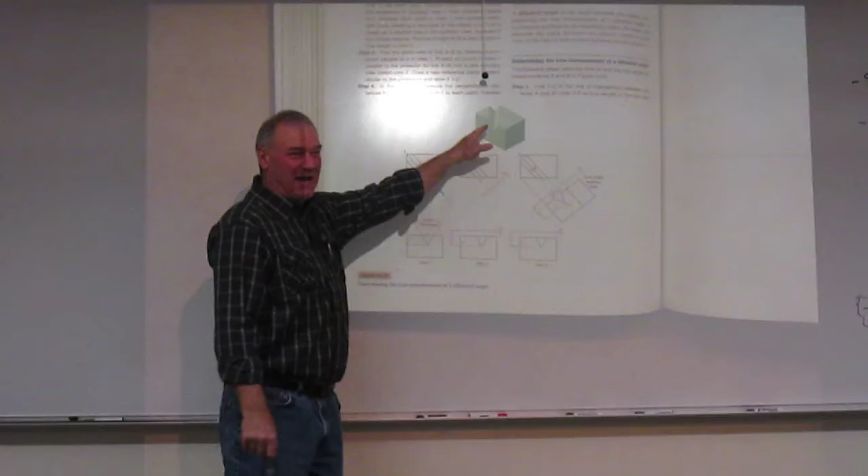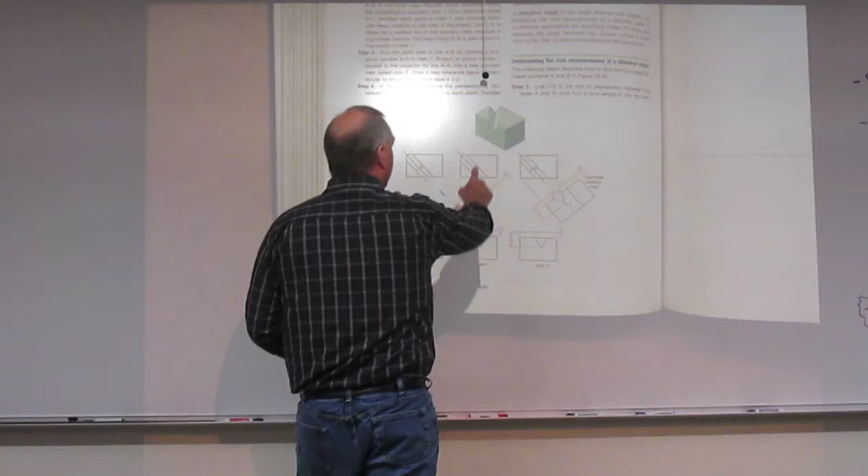Here's a dihedral angle. In essence, a dihedral angle is an angle formed by the intersection of two planes. Now, the problem we have with dihedrals: they're not a problem if we can see them in orthographic projection, but many times they're like this one, where they come at an angle to our normal planes. Therefore, you're never going to see this angle of cut. So if a person's constructing this, how do they know what this angle is? Because they're going to have to set a machine up on that to cut it, and we can't describe it to them.

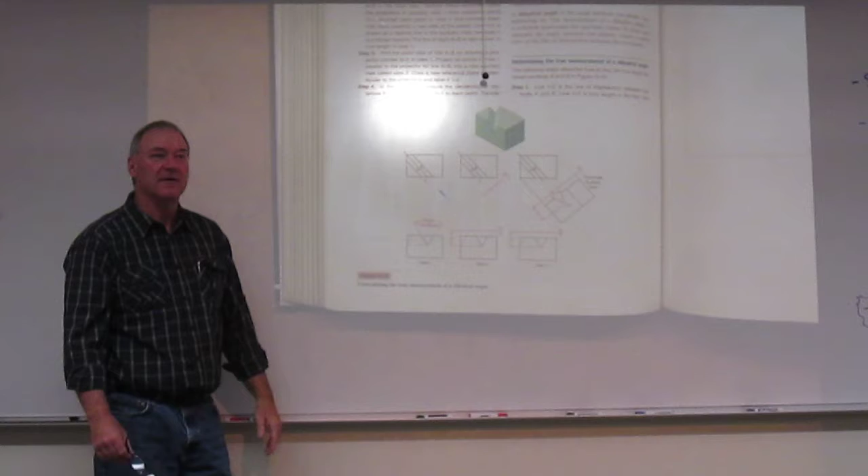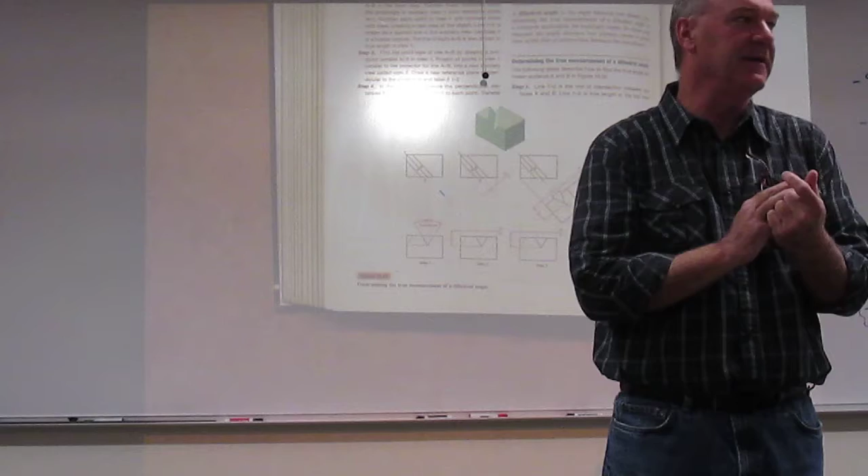Standard orthographic projection you see down here, none of these angles are going to be right. So we don't really know what that angle is, and we aren't telling them. We've got to be able to solve this one. They showed the solution of it over here. So in essence, we're going to use the information in Chapter 13, auxiliary views, to solve the problem of inclined planes, oblique planes, and dihedral angles. That will solve those three description problems. So those are the three reasons we do this.

Now, if we're going to jump into a chapter called auxiliary views, I guess we ought to define auxiliary views. Did anybody pick up in the text what an auxiliary view is? Wait, what did she say? It's an orthographic view that is projected onto any plane other than one of the 6 principal views. Thank you. That's a good way to say it. To summarize, auxiliary views: any view other than your standard 6.

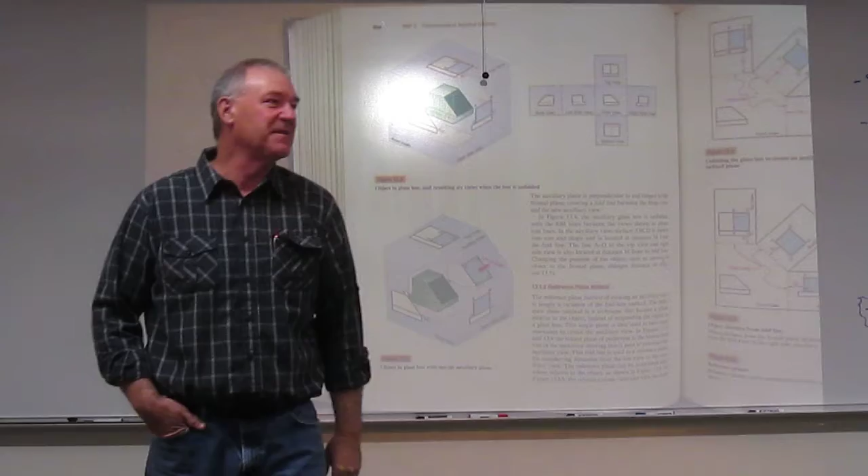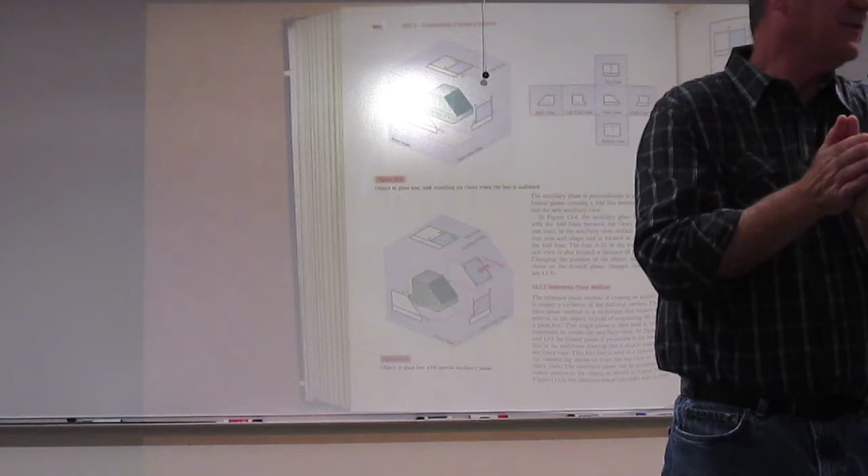I want to look on page 654, and we're going to compare and contrast figures 13.2 and 13.3. This is a pretty good example of what we do on auxiliary views. In 13.2, we have our standard glass box. Is this glass box real? No, it's not, right? It's an imaginary plane between us and the object, where we sit at infinity. Our line of sight is perpendicular to these sides. It's an imaginary glass box that we put out to be able to produce these views.

Now, if it's imaginary, do we have to stick with 6 sides on it? No, let's just start imagining other sides. We're not going to imagine them anywhere, though. We're going to come down to 13.3 and imagine a side that is parallel to the plane in question. So that's in essence what we want to do. We're going to put it parallel to our recognized plane, in this instance an inclined plane.

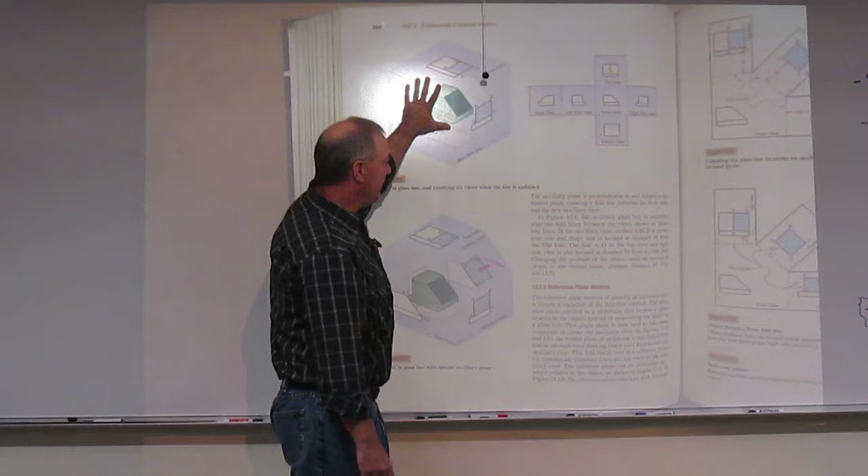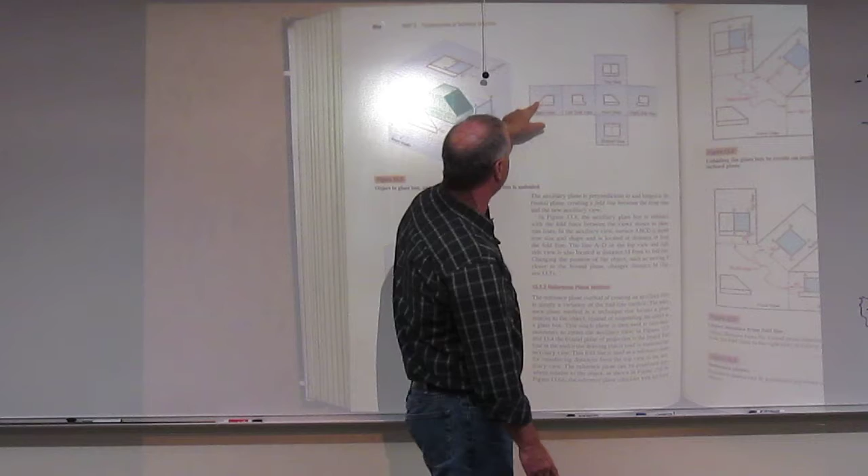Now when you look at the resulting views, here's orthographic projection. We've got this inclined plane. I see edge here, but then it's foreshortened, foreshortened, foreshortened. Where do I even see it here? Foreshortened, and then edge again. We never see it true, even in 6 views.

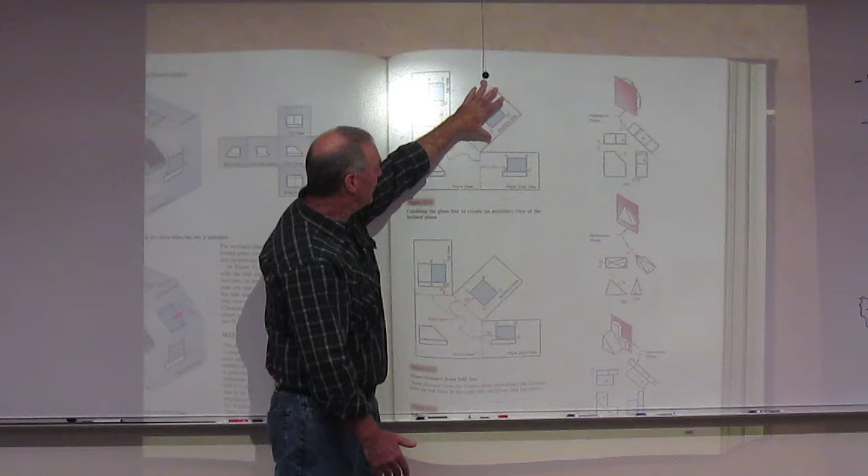Now, if we look at the projection that comes off of 13.3, it's shown on the next page with figure 13.4, which is right here. Again, we've got all the geometry described: edge, foreshortened, foreshortened. But here's that plane we put parallel to our inclined plane. We unfold it just like the glass box and put it here. Now I see that plane true size and shape. So somebody now has the information to build that surface on this object.

So in essence, that's what we're doing. Any questions or thoughts on this? Well, today we're going to take this and we're going to go through all the definitions of it. Tomorrow we're going to look at it and see how we do them. Let's go to page 656 and let's handle some more definitions here.

When we are pulling auxiliary views, we have 3 types that we pull. And we want to know these terms because we need to communicate that to other people, other drafters, and say, hey, I want you to look at this view, we need to know the names. In essence, this diagram here doesn't make a lot of sense other than a definition. That's the only thing this is here for.

Here's my front and top view. This to me looks kind of like a hip roof. You'd see this on a lot of houses. Okay. Now, they're not really turning this in the correct direction, but just keep in mind, these are our standard views. They have turned one auxiliary view right here. This is called your primary auxiliary view or just your auxiliary view when you're talking to somebody. What that means, it's always the first rotation off of a standard 6-view drawing. Primary auxiliary, first rotation off of a standard view.

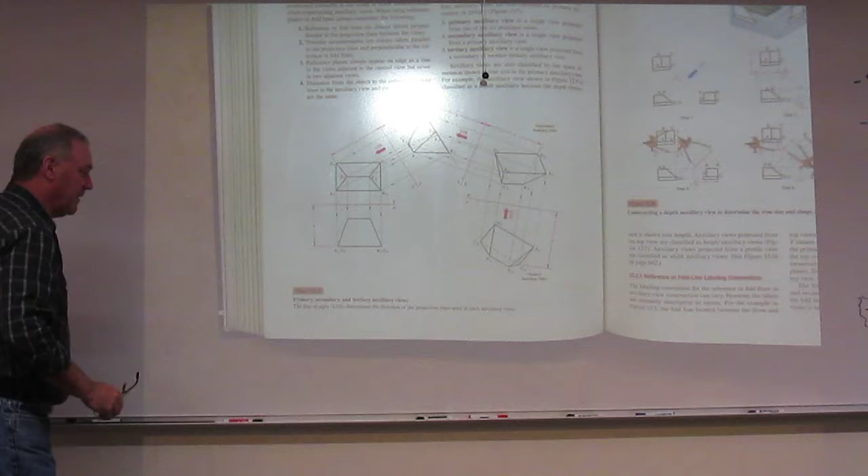Now, when we take that one, if we're going to rotate it again, like to this view, now we've produced a second auxiliary view. We call that, of course, a secondary auxiliary. If we want to take that and rotate it again, we have a tertiary, or the third one. So in essence, when we take these objects, we have the geometry. We know from the rules of orthographic projection, if you can locate a point in 2 views, you can locate it in any view. That's true here also.

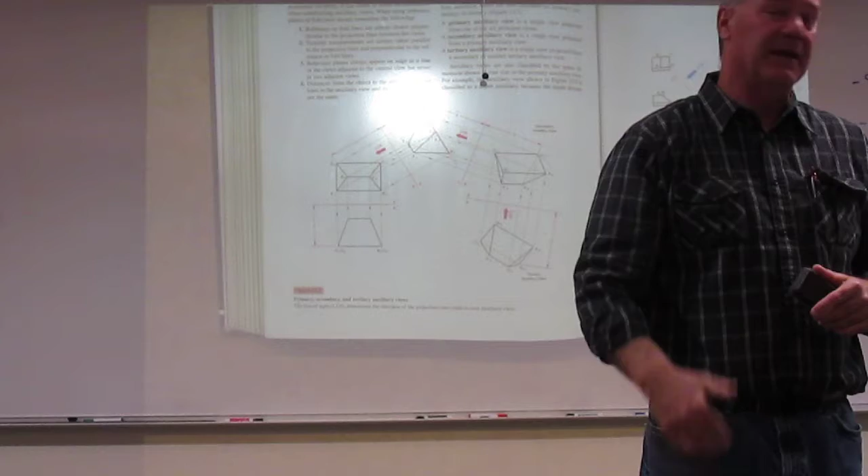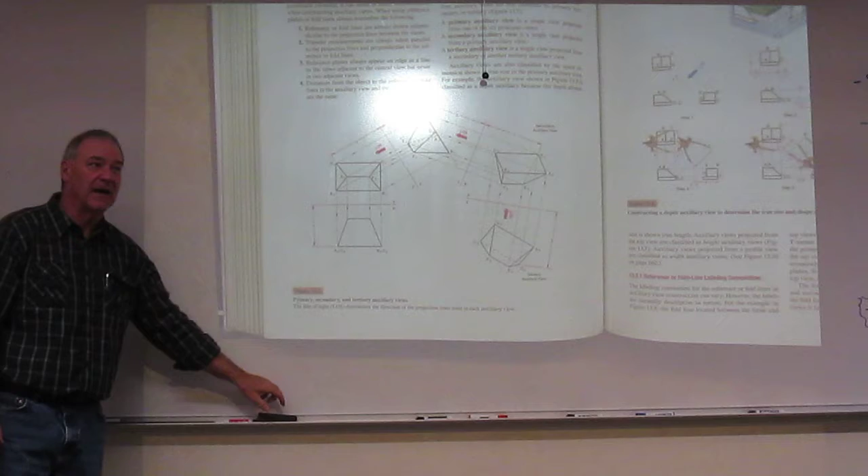So we can take an object like this and we can start tumbling it through space. Now, certainly, we are going to tumble it in certain directions that aid our needs. If you do it correctly, you'll never have a need to turn an object over 3 times. Ever. It should always be solved in 3 rotations. And in fact, when we get through chapter 14, you're going to find we actually only need to rotate twice because there will be a shortcut we introduce in there to get us out of that tertiary rotation.

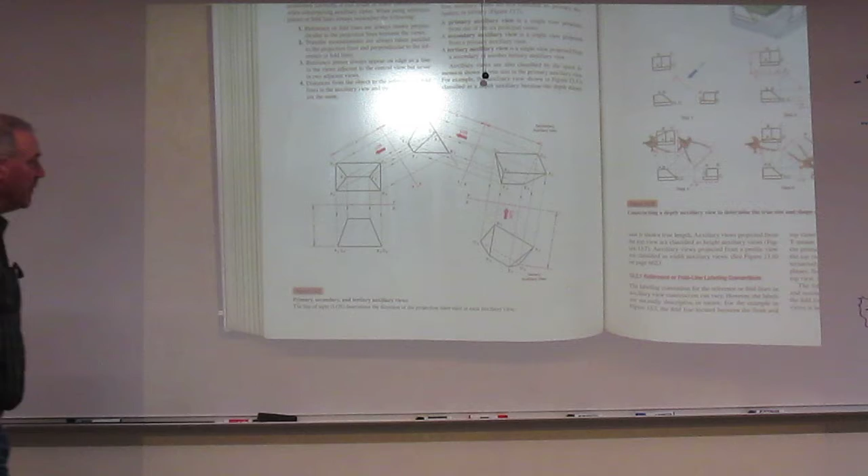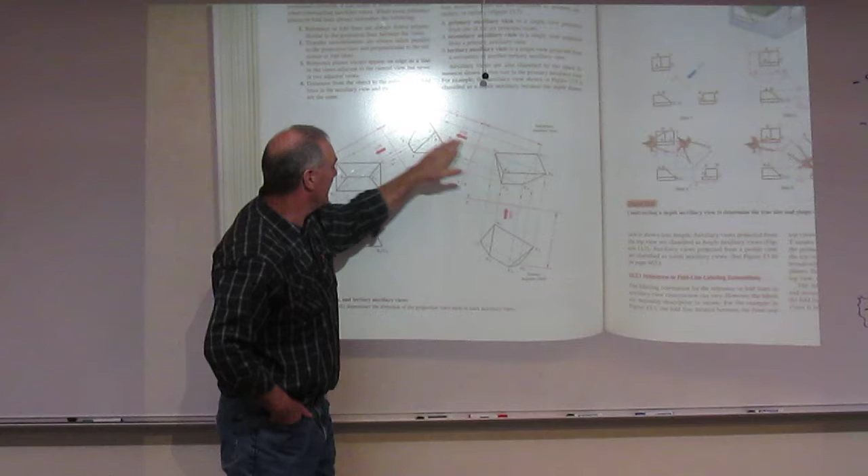Now, you might say, how do I build these views? Well, I'm using these 2 to build this one. I use these 2 to build that one. I use this one and this one to build this one. We just keep stepping along this process to draw these objects. So primary, first view, rotated off of a primary view. Secondary, it's an auxiliary view rotated off of an auxiliary view. A tertiary is the third rotation. And you shouldn't have to go further than that.

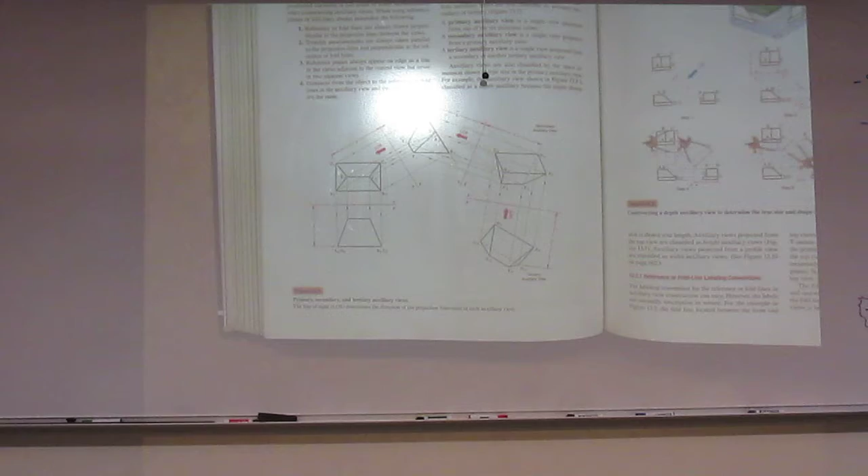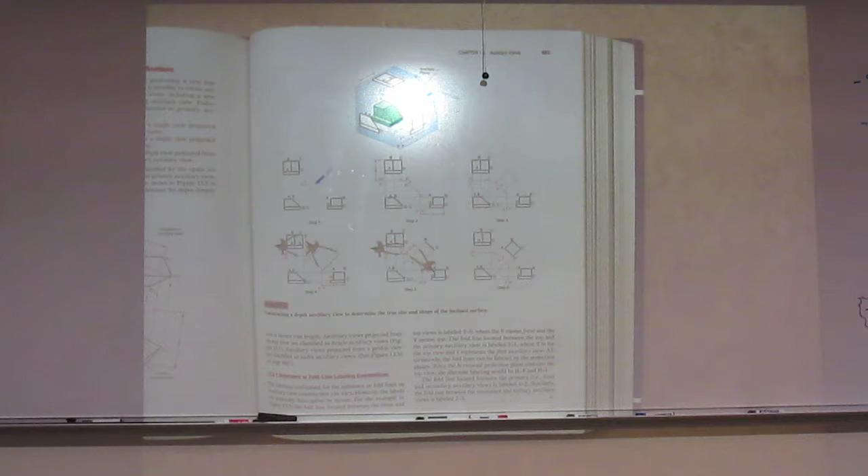Now, besides those naming conventions, we've got some other naming conventions. There's 3 of them called the height, depth, and width that we also want to know about. Figure 13.8 across the page here shows a height auxiliary view. I believe it's height, right? No, a depth. They're doing depth first. Now, this naming convention is actually going to help you understand the dimensions you're looking at when you are looking at an auxiliary view. Now, I want to look at this guy. Let me kind of zoom in on it because I need to do a little writing on this.

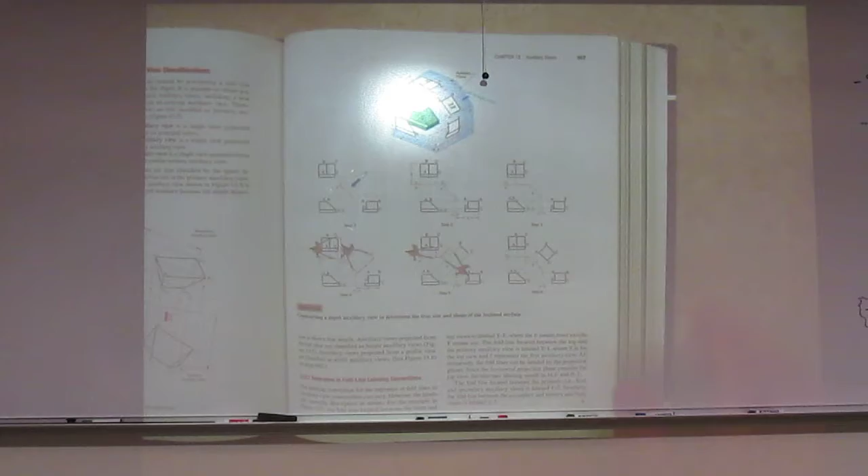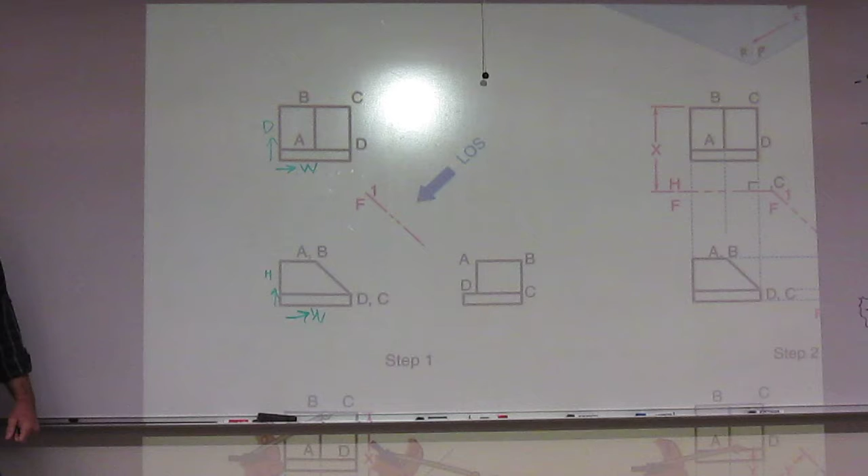So here's our 3-view drawing. Keep in mind what's going on as far as dimensions, where in the front view, I have width and I have height. In this view, I've got depth and width. Now, when I turn the auxiliary view, in essence, this auxiliary view is being rotated off of the front view into this view. What is the only dimension missing from here? Depth, right? So when I turn and I draw this view out in here, that dimension right there is depth. Because I've got these two, now I'm going to rotate at 90 degrees. The only dimension that will be true in this view is the depth dimension.

So any auxiliary rotated off of the front view is a depth auxiliary view, because it's the only true dimension. The other two are here in this view. You have height and width in that view, but they're kind of skewed. Because we can't draw this guy without a little bit of width and a little bit of height, right? Because it's got those two components in it. But they're skewed.

Depth is true size and shape. Now, when I look at that, there's another one over here. I didn't write this one in. Is that depth? There? It is, right? So in essence, my auxiliary view is a related view to my top and right in this instance.

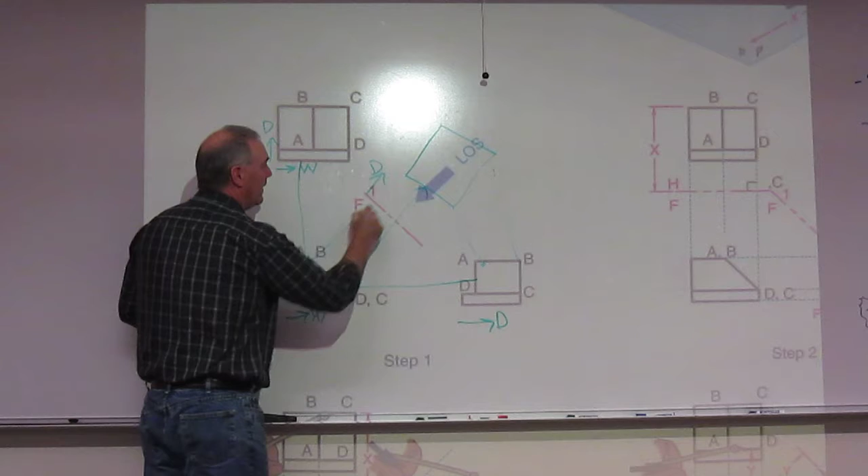So how do I get that depth dimension? I project from this view and this view. Now, remember, they're related. Okay, so you cannot project from here directly into here. You can't do it. Okay? Your geometry falls down. What you have to do, since they're related, is you have to project from here to here to here, or here, here to here. We always come through the adjacent view to building.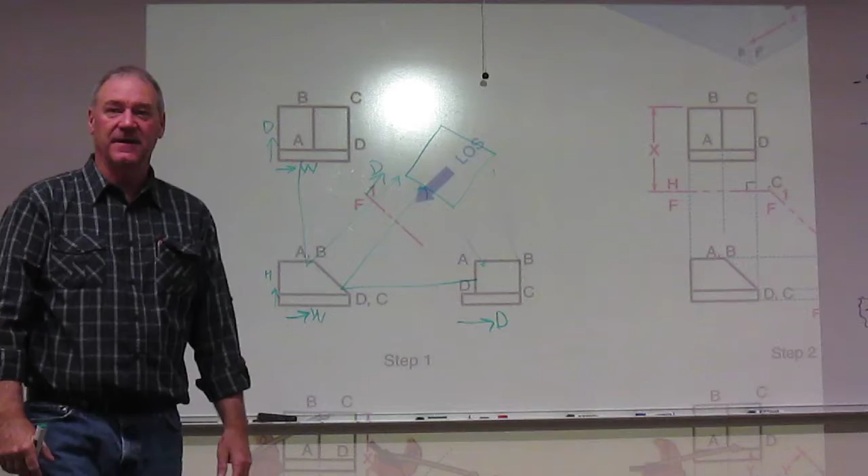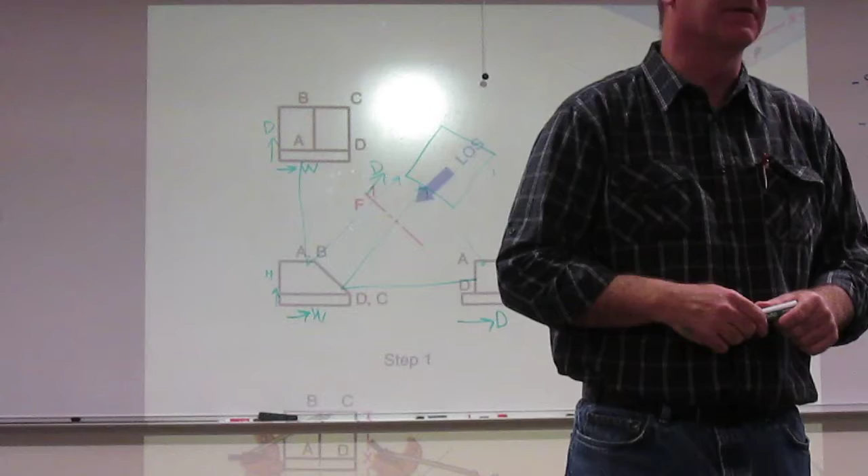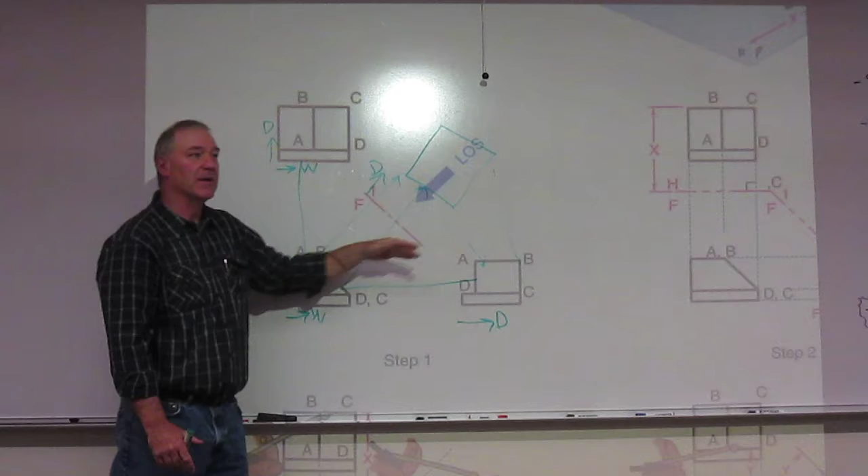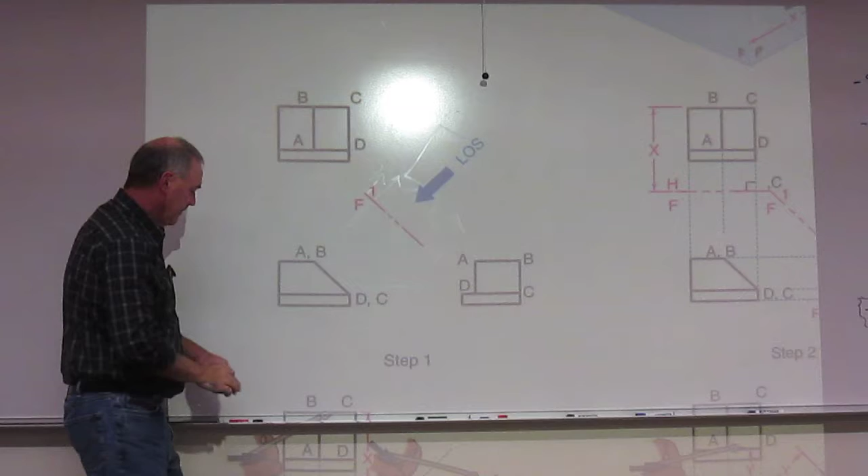You can set up miter lines on these, but they're fairly complicated, and so I would highly recommend you do not do it. In fact, I'm not even going to show you how. Okay? And we're always going to use the fold line when we start tomorrow constructing these things. So just keep in mind, even though this will be a depth auxiliary, depth is a true dimension, it is not adjacent to this guy and this guy. It's related to them. So therefore, we got to go through the front view. So any auxiliary view rotated from the front is called the depth auxiliary view.

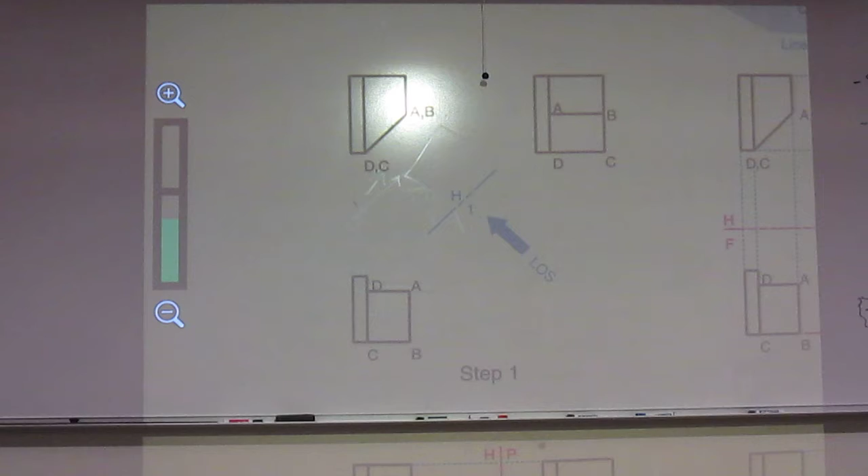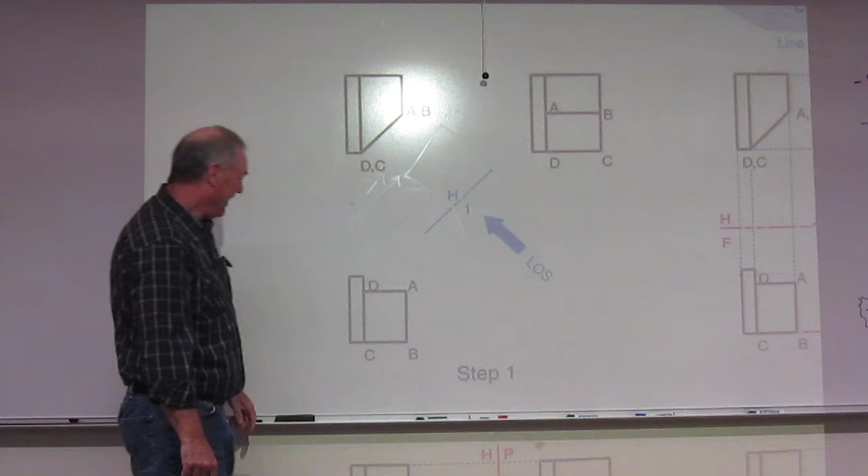Now let's go to the next one, figure 13.9. So on figure 13.9, here they're rotating an auxiliary view off of the top view. This is kind of drawn pretty weird. This is supposed to be a front, top, should have the right here. Okay. This is the right view. That's actually front, top, bottom, whatever. This is a top view.

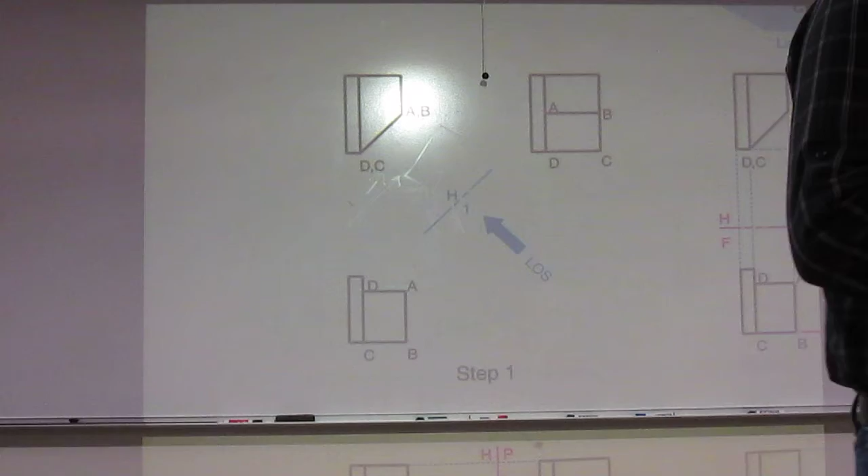Okay. Now, in a top view, what are the two dimensions you have? Width and depth. So if we rotate an auxiliary view off of it, what do you think we call it? Height. Yeah, the missing dimension, because it's going to be the only true dimension in my auxiliary view. Okay, so we're going to call it a height. So when I pull this view, like they show in the preceding steps, the height dimension will be true. That's it. The others will be there, it'll be kind of, again, a little skewed.

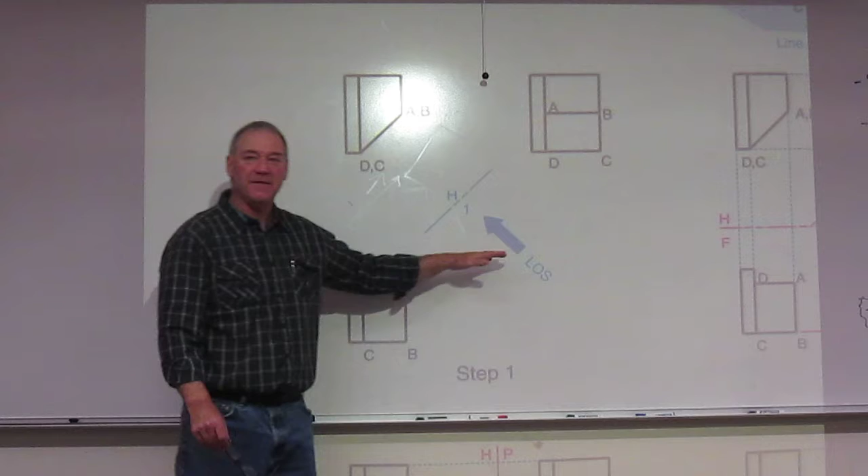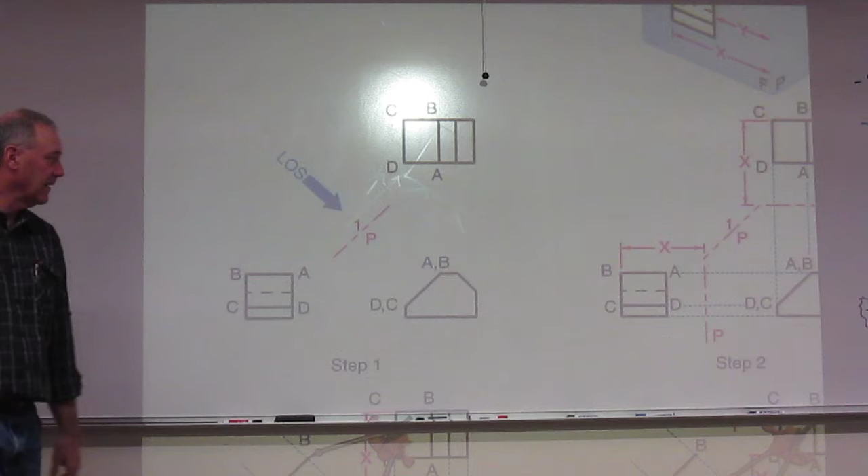We go from the right side. What do you think we're calling that one? Yeah, that's on the next page, figure 13.10. Here they're pulling off of a right side view. Right side has height and depth, so therefore the auxiliary view would be called the width auxiliary view, because your width will be the true dimension shown in here.

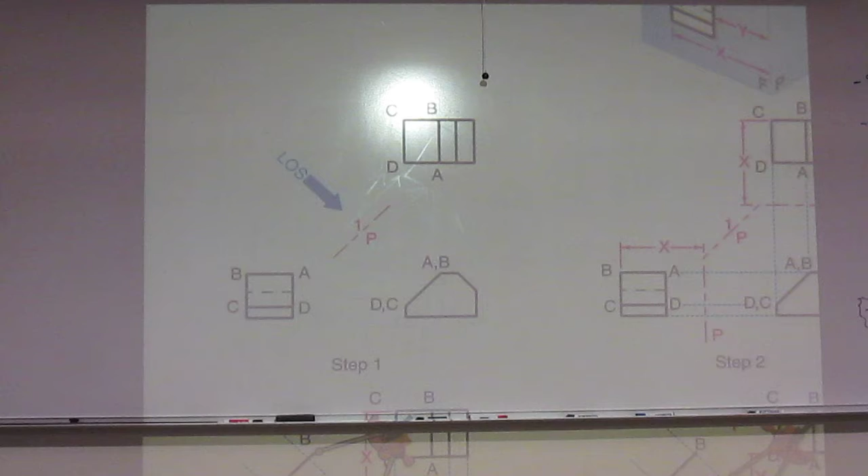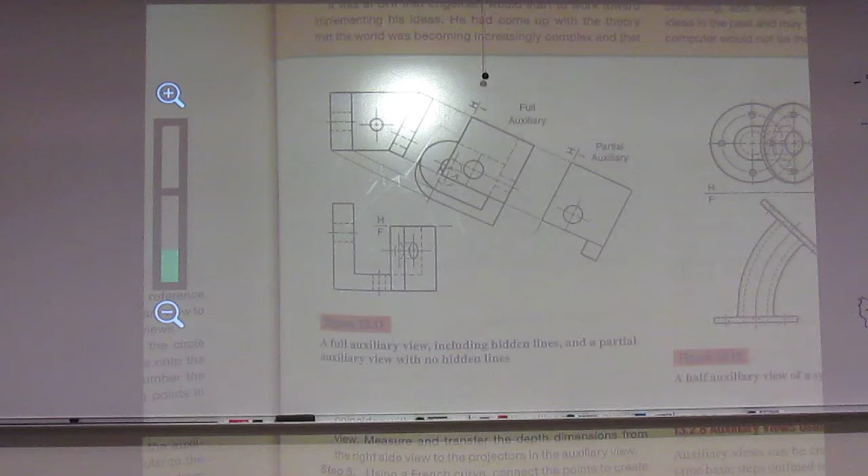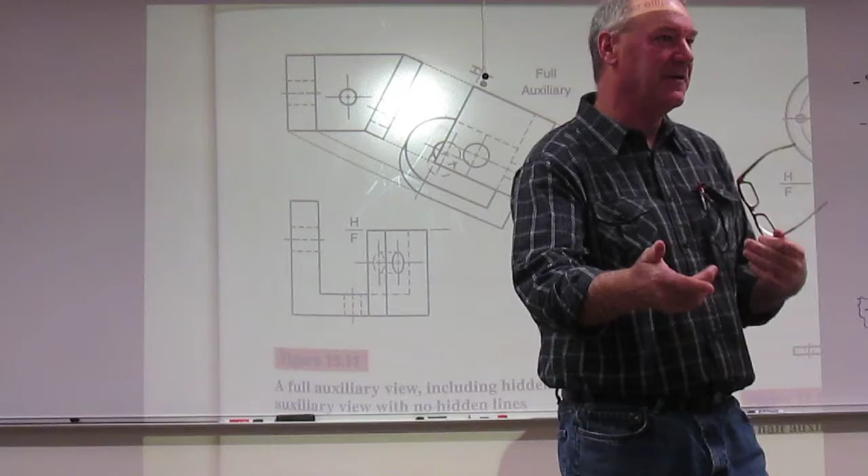Now, some other things we do with auxiliaries. These are kind of shown on 663. And I want to look at figure 13.11. When we pull an auxiliary, keep in mind that you can get a boatload of foreshortened surfaces in an auxiliary view. Because think about it. When you do a standard view like here, front and top, who picks the front view? We do. We pick it based on how it's being used in industry, and then second, difficult geometry that's easy for us to draw. So in essence, most of this object is going to be described adequately in our 6 views.

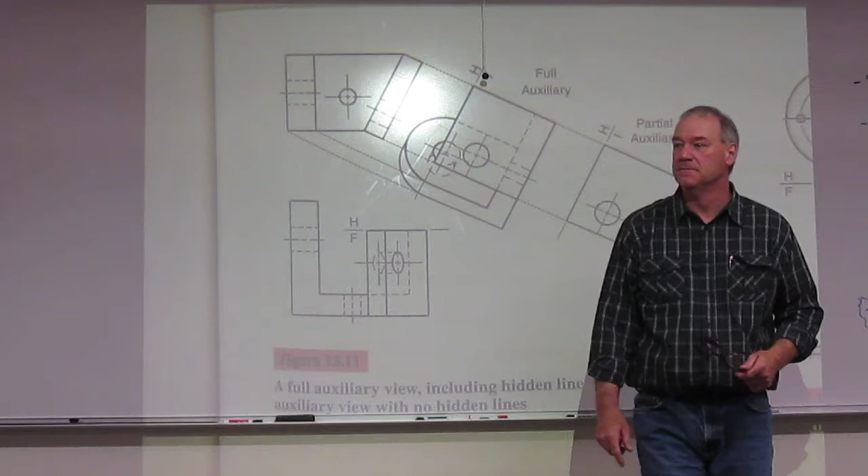The only reason we're pulling this is for that inclined or oblique view, and many times those planes, we don't have a ton of them. So in this instance, we got 1 inclined plane here. They're pulling that. If I was to do the view projection, this is true size and shape now. But all of this is foreshortened. Okay? So we're confusing the issue by giving them the whole drawing.

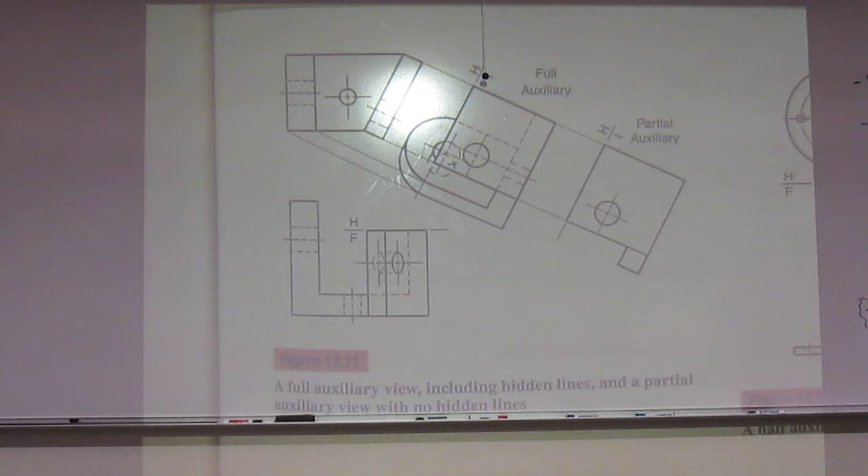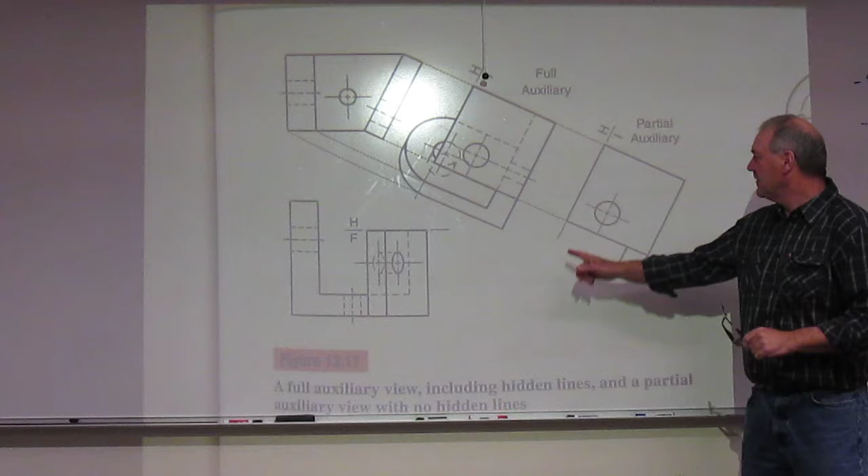We had a convention back in chapter 10 that allows us to clean drawings up when we get a whole mess of things. Remember what that one's called? What was that convention where we don't show the object in its entirety to clean it up or make it clearer? Yeah, the partial convention. Almost always with auxiliaries you will invoke the partial convention. In essence, the only reason for turning it is this plane, okay, because the rest of it's all described.

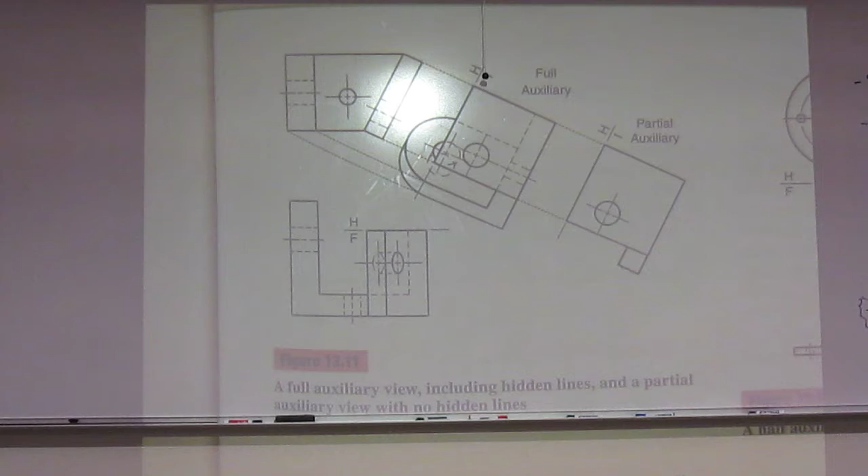Here's your short break line. We're not going to bring the rest of the object with it. Okay? We're just going to take the plane in question and describe it. So use that partial auxiliary, that partial convention. They show you another example of this on 13.12. Great use of the partial convention. Here they're breaking the auxiliary view on the center line because the other half of the circle is redundant. Okay, but now we get to see that top flange and know how to construct it.

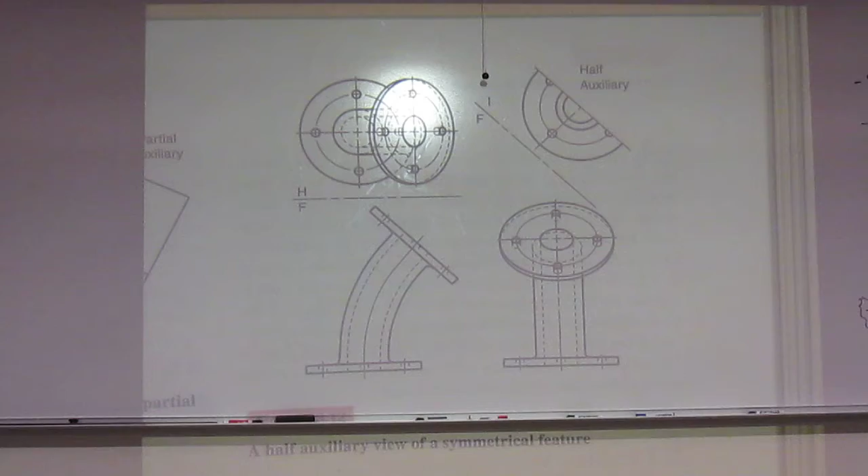As you go through here, let me just real quickly, I don't know. Let's just leave it right there. I think we covered the definitions. Okay. So just to summarize, an auxiliary view, what is it? Any view other than your standard 6.

When you pull an auxiliary view, if you're coming off of the front view, you would be creating a depth auxiliary. If you're pulling off of the top view, you're creating a height. If you pull off the right side, you're creating a, I gotta think here. Width. It's a width. Now, if you rotate off of any of those auxiliaries, so I can have a primary depth, and I rotate off of that one, that would be a secondary. And then another one would be a tertiary.

Last thing we need to review, inclined plane. How do you recognize it? Edge in one view, foreshortened in all adjacents, right? Look at your resulting 6 views or however many you drew, and you should be able to find that. An oblique plane, foreshortened in all views. As soon as you see those two, I'm doing auxiliaries. I've got to. That's part of my job mantra.

And then the last thing, dihedral angles. Any angle formed in space by the intersection of 2 planes, if we cannot see that through standard orthographic projection, we use the auxiliary view process to describe that also. So you could have multiple auxiliary views for each plane, incline, or oblique? Yes, you could.

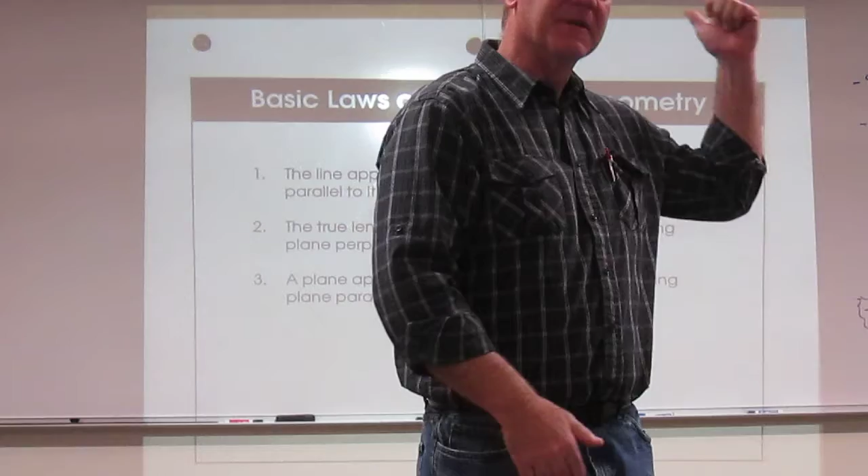Now you see a bunch of words here. You don't see diagrams saying I got to turn this and this. Well, we'll get to all that, but this is the mantra of it. This is all of chapter 14 summarized. So if I've got an inclined plane, I'm doing law 1 right here. These, by the way, are the basic laws of descriptive geometry.

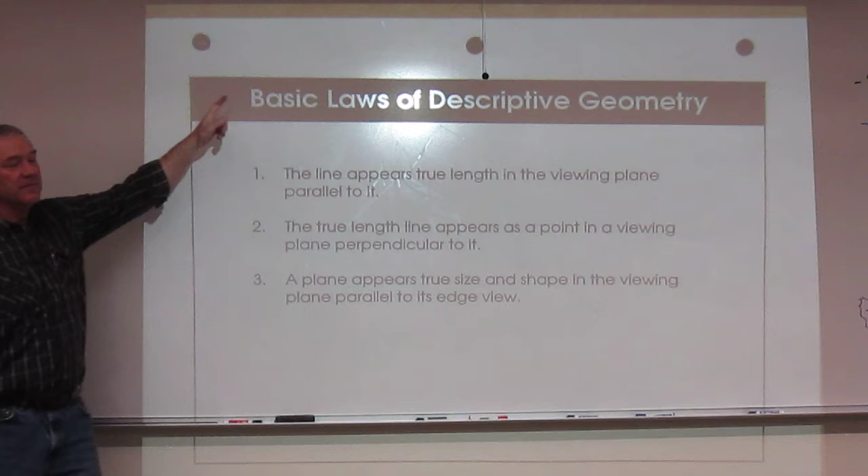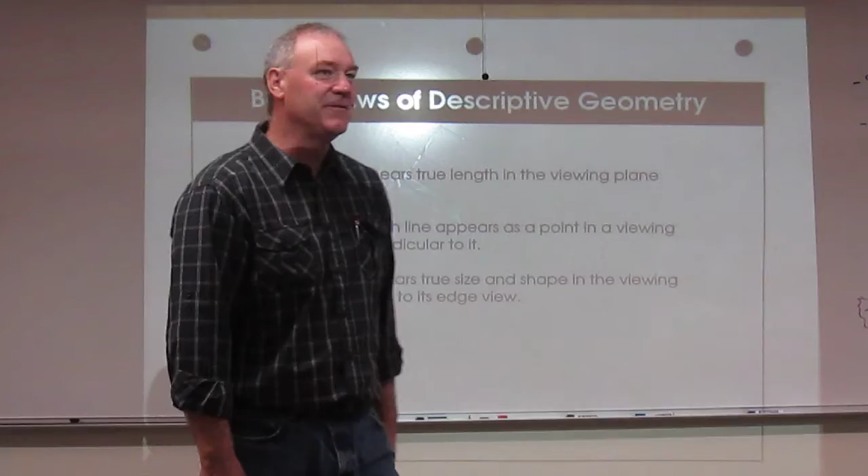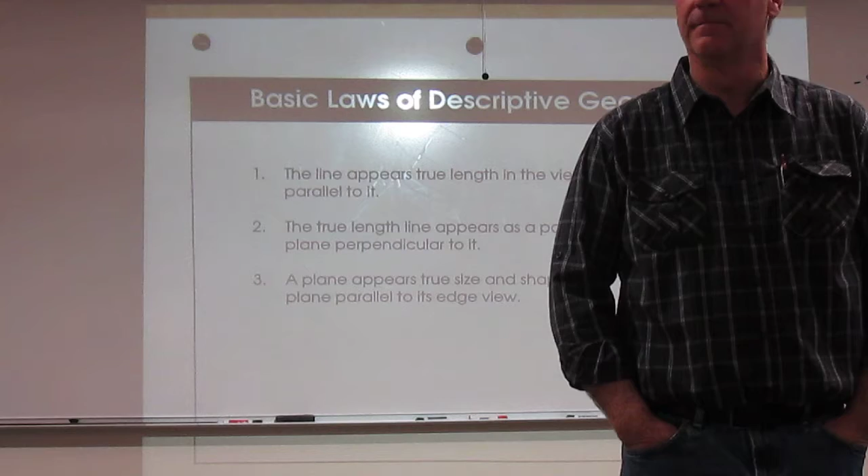What's the difference between a theory and a law? Mathematically, or I guess just as the English language uses those two words. What's a theory? Something that has been proven. Fact-based thing. Idea. It's an educated guess, right? It's an educated guess, but you can't prove it, you don't know. Like the theory of evolution or relativity. We don't know that those happen, people have guessed.

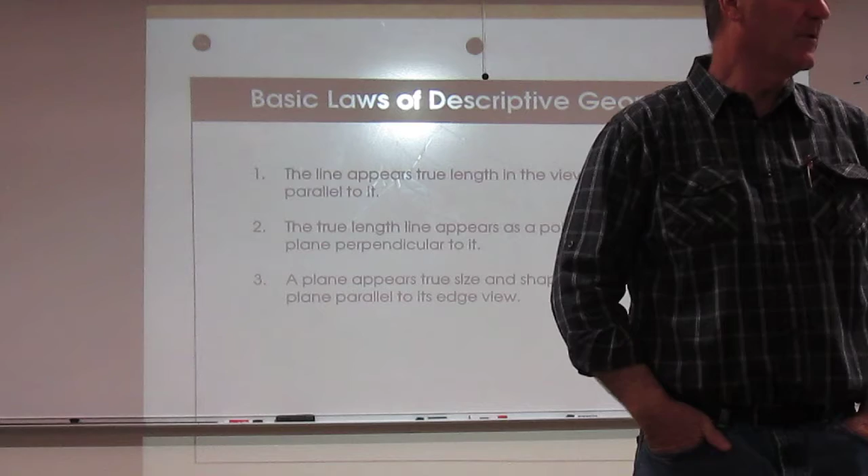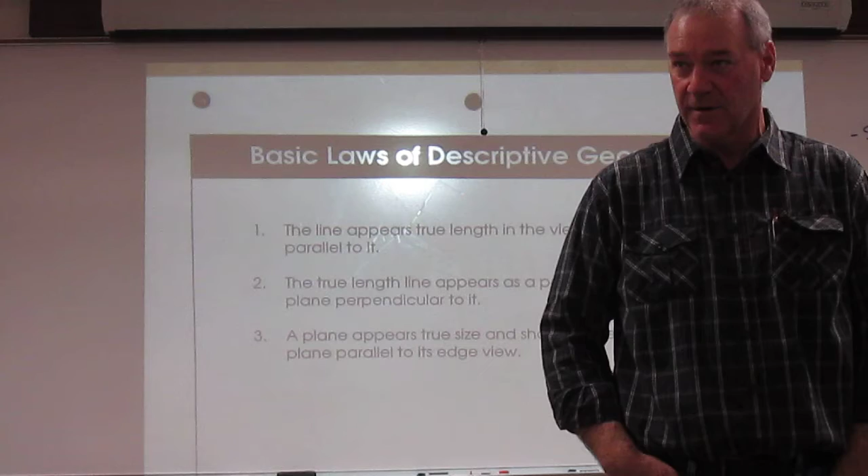What's a law? Yeah, Amy? It's been proven, right? It happens every time. It will always work. Theories fall down. Laws don't. These things right here are mathematical laws for geometry. Try and memorize them verbatim.

Line appears true length in viewing plane parallel to it. That's going to solve inclined planes. That one statement right there. We'll dive into this and define all this for you. Number 2, the true length line appears as a point in the viewing plane perpendicular to it. There's your dihedral angles right there. May not make sense, but it will once we start using them.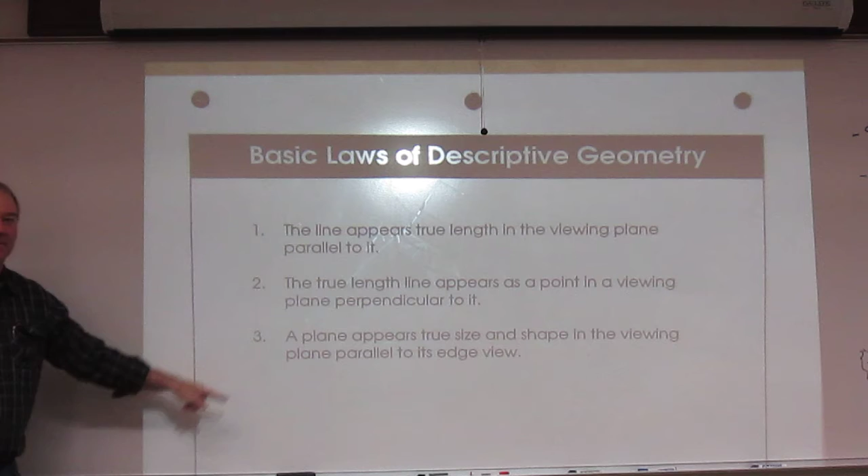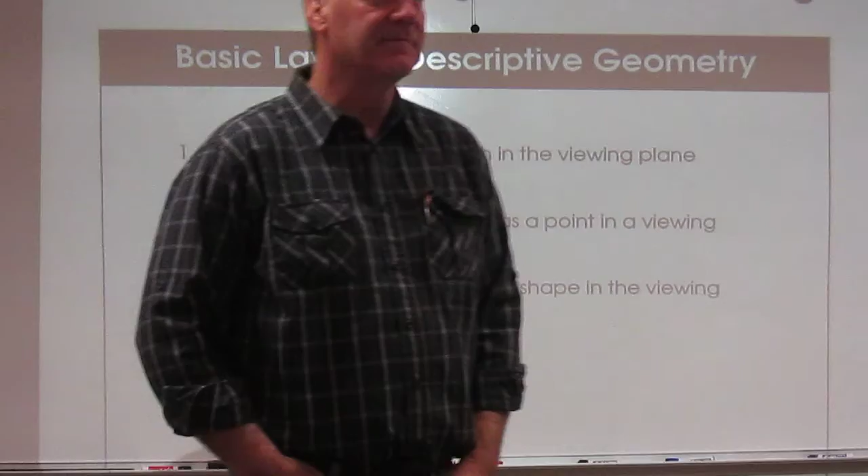And the last one, the plane appears true size and shape in the viewing plane parallel to its edge view. That's obliques. We're going to use these repeatedly to solve these problems. I wanted to give you this early so that you can start looking at it and digesting it a little bit. We will put it in action tomorrow.

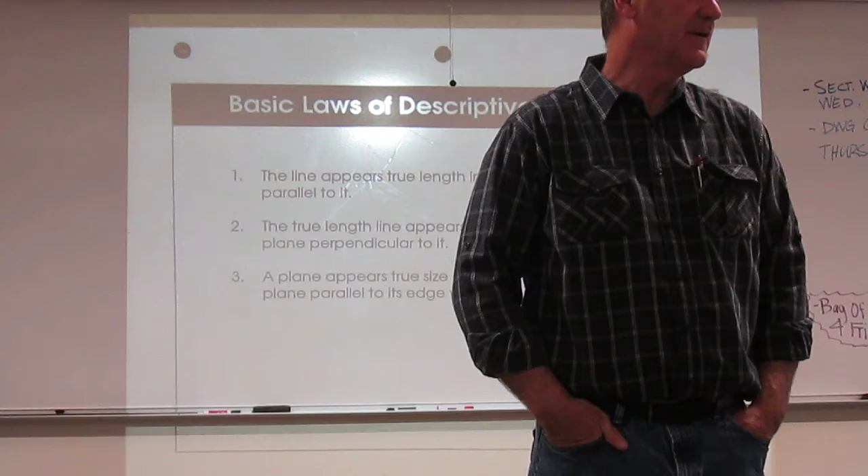So tomorrow we're going to come back into this chapter. I will probably paste a file out on your Google Classroom. We'll all upload it and make sure we can produce an auxiliary view. We'll look at the ways we do it. That's all I've got for today.

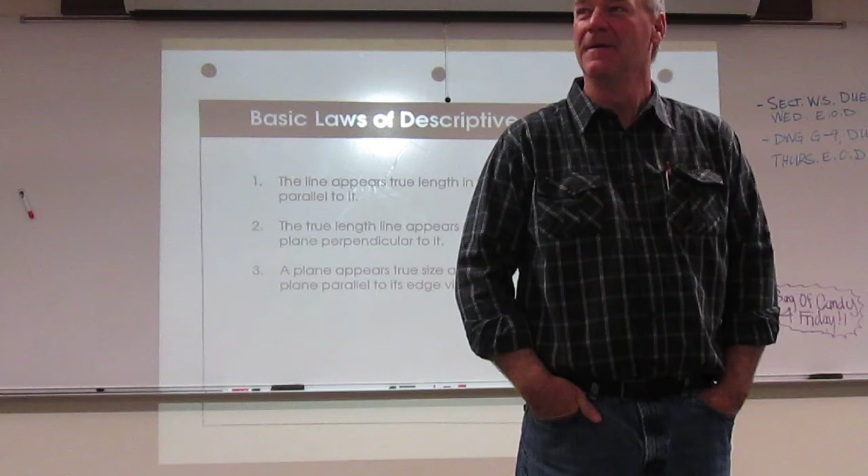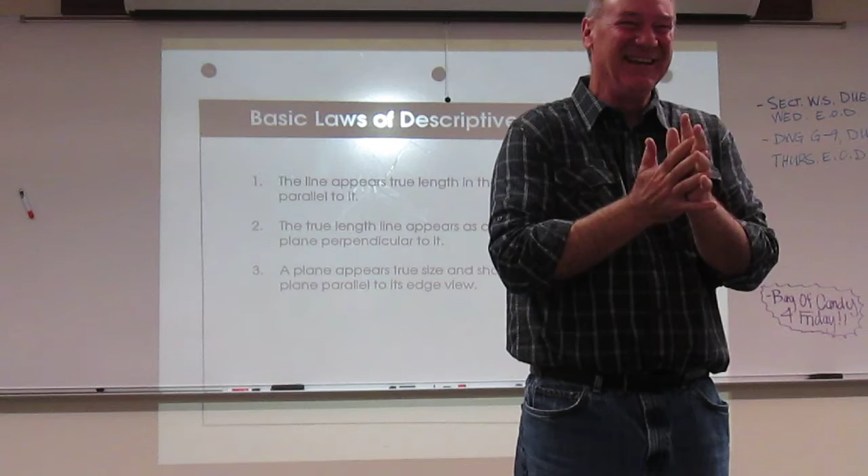This is getting good, huh? Half hour or less. Amy, thank you for the round of applause on that. Well deserved. All right, so the rest of the day is yours. Remember, you might get a little bit of noise around here this afternoon. Just ignore it and keep working and doing what you're doing.